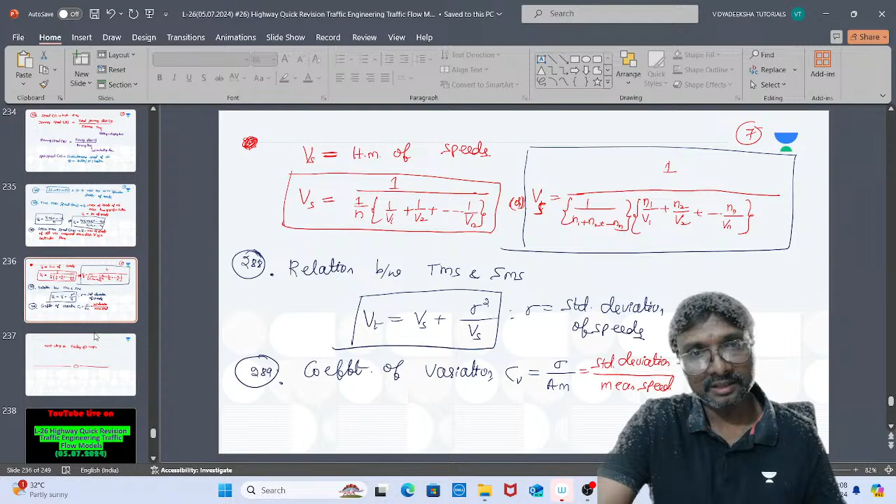Coefficient of variation, so 289 point gets over. Now we'll be going for the 290 point, and what is it? Traffic engineering, traffic fundamental models. Fundamental models are the fundamental flow models. We are going to discuss about them, 290 point onwards. So any doubts in yesterday's class? Up to yesterday's class, any doubts anywhere? So this is the highway engineering quick revision, this is your first slide.

I can call you Pavan. Okay, very good. Because generally whatever name I see there, with that name only I'm more comfortable calling. One sec, just a minute. I think here something is there. Sorry, in this video it will come, not in the display capture. Okay, one second. Is it okay now? In the background these are not visible now? Yeah, now my image will be clear. Okay, very good. You also attended? You did not comment anything?

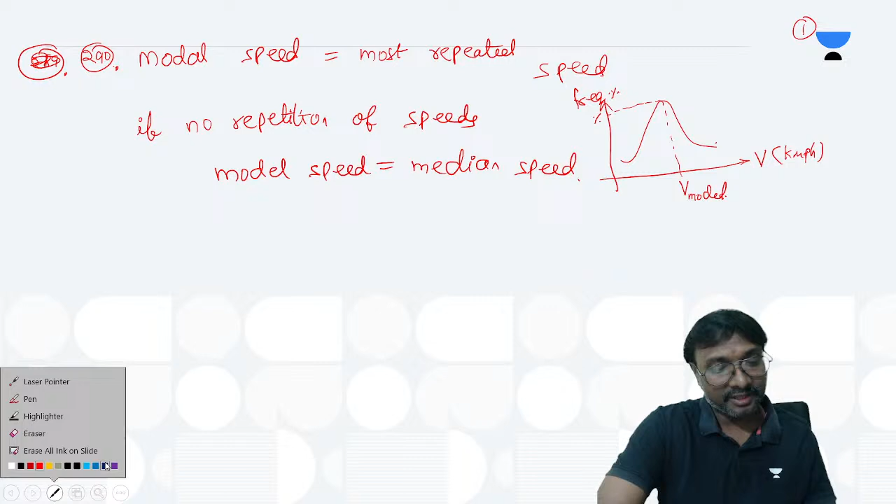Any idea? The modal speed will be taken equal to your median speed. So what is that median speed? Median speed is nothing but the central speed. It is not the average value, it is the central speed, right?

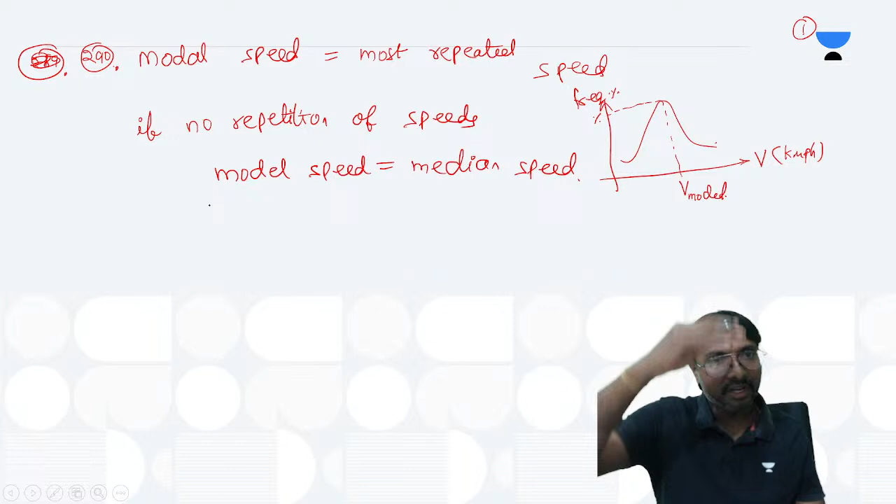Central speed means, suppose you have some 5 values, arrange all the values in ascending or descending order, and the middle value will represent the median speed. And if you have 2 values at the middle, you have to calculate the average of those 2 values. Got it? Now what is another one?

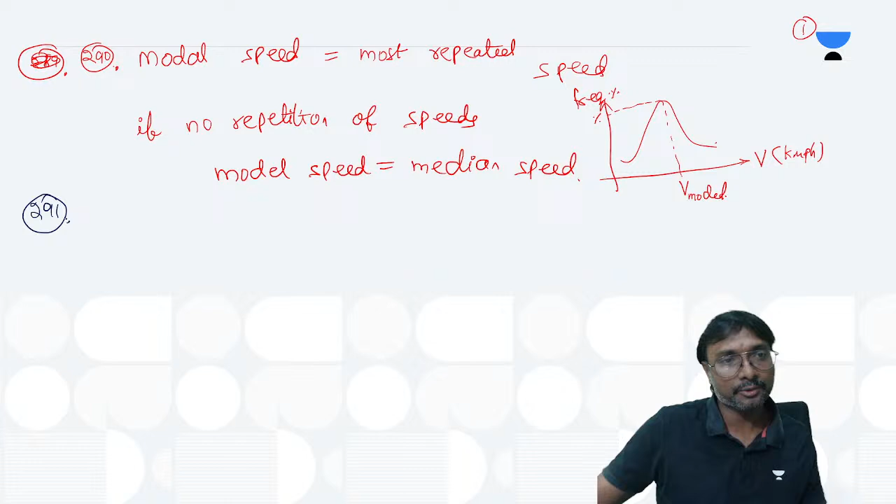So here, 98th percentile speed. What is the 98th percentile speed used for? This is the geometric design speed. It is useful for geometric design purposes.

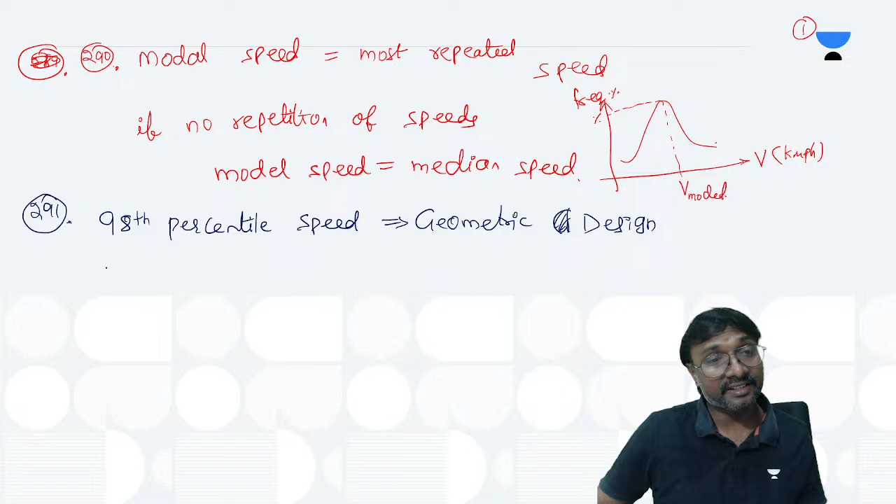Now whenever you are designing for this 98th percentile speed, can we keep the speed limit as the 98th percentile speed, or is it better to keep the speed limit lesser? If you are designing for 100, you keep the speed limit at 80, so that they will travel at 90 and will not cross 100.

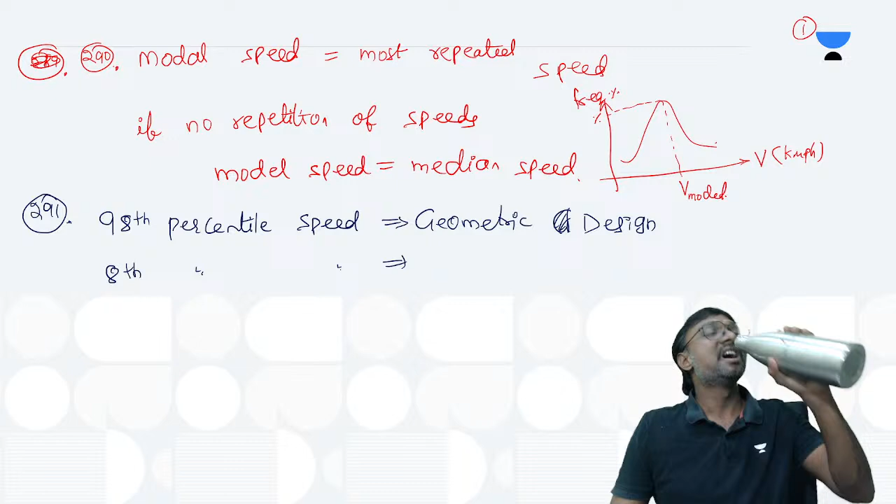Based on the psychological behavior of people, when you are designing for the 98th percentile speed, what do we need to do? You have to allow the safe speed, or maximum speed, lesser than that only, definitely. So it is your safe speed limit, or you can also call it the maximum speed limit

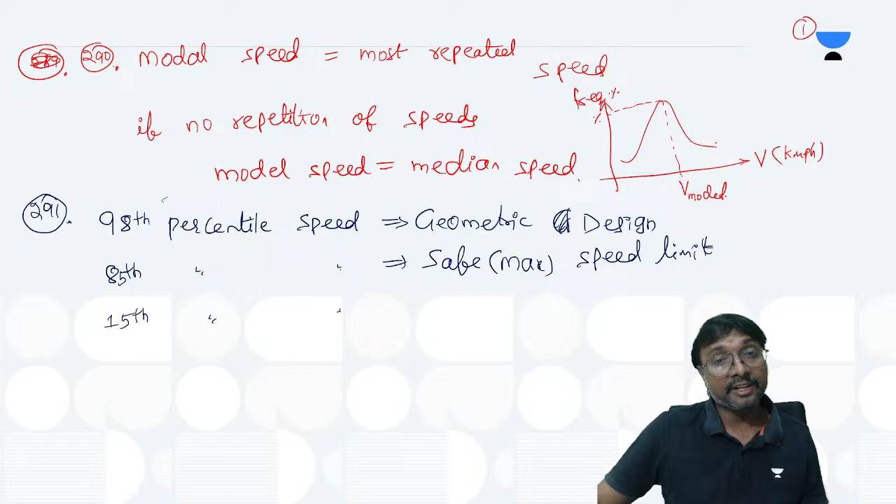on the road. The speed limit boards you find on the road are 85th percentile speeds. Not 8, 85th percentile speeds. Now what is the 15th percentile speed? It is taken as the minimum speed limit. This is the minimum speed limit we have to go for. Is that clear? That is regarding speed.

Now next one, traffic density or traffic concentration.

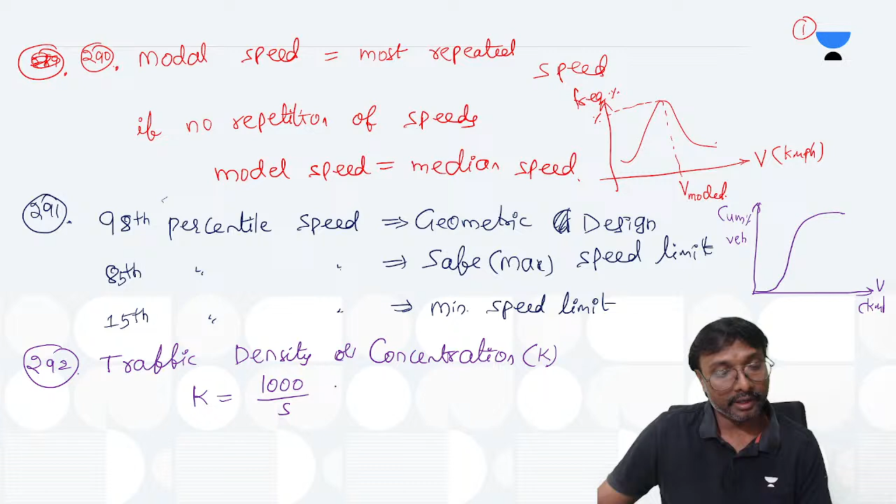So what is the symbol we are using for this traffic density or this concentration? K is the symbol we are using, right? So how can you get this K? That is 1000 divided by S, or you can also write it as 1 divided by S, right? 1000 by S or 1 by S.

First of all, what is that K value representing? Tell me. That K value is the number of vehicles present per unit length at a particular time of observation. What is that unit length we have to consider? 1 kilometer we have to take as a unit length. The number of vehicles per kilometer you have to consider, right?

If S is in kilometers, K is 1 by S. If you are substituting S in meters, it is 1000 by S. Why that 1000? Tell me. That 1000 is useful for conversion from meters to kilometers, right? That is how you can calculate it.

What is that S value here? That S value is the average center to center spacing between vehicles. Average center to center spacing between the vehicles, right? Or you can also get it as the average length occupied by the individual vehicles, right? Got it?

Now this one, tell me. Do this and tell me, then we'll move to the next part. Okay, done. That is your

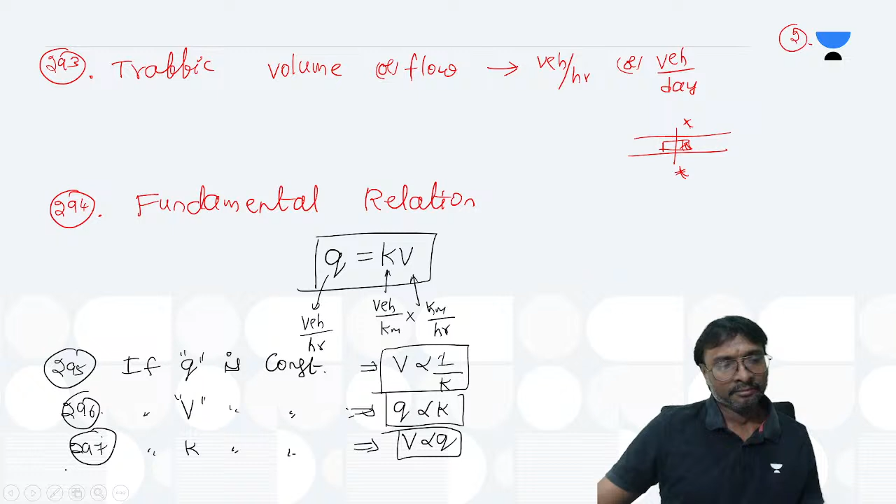Now if we just observe, which one is important for us? Tell me, the maximum flow is only important for us.

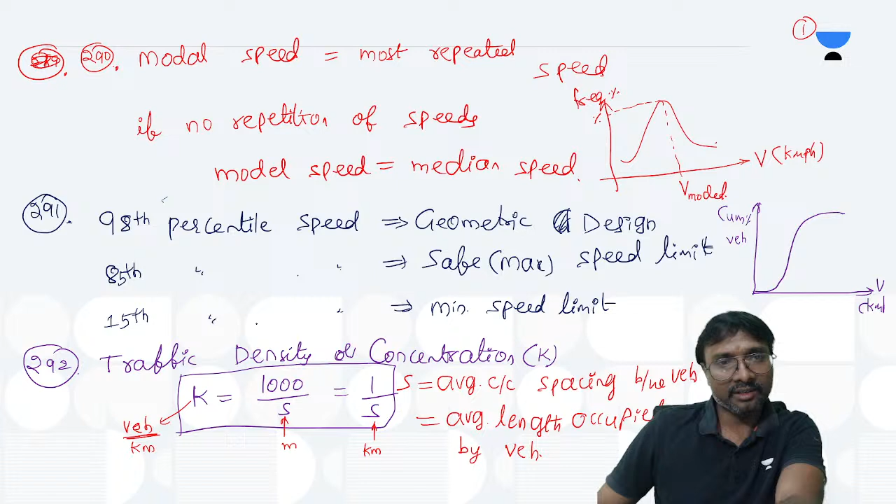Where has it gone? One sec. Whatever I have written, it has gone completely. Arre baba. Is it gone? One second. It is there. After this, nothing is there. One second. It was not there. It is erased.

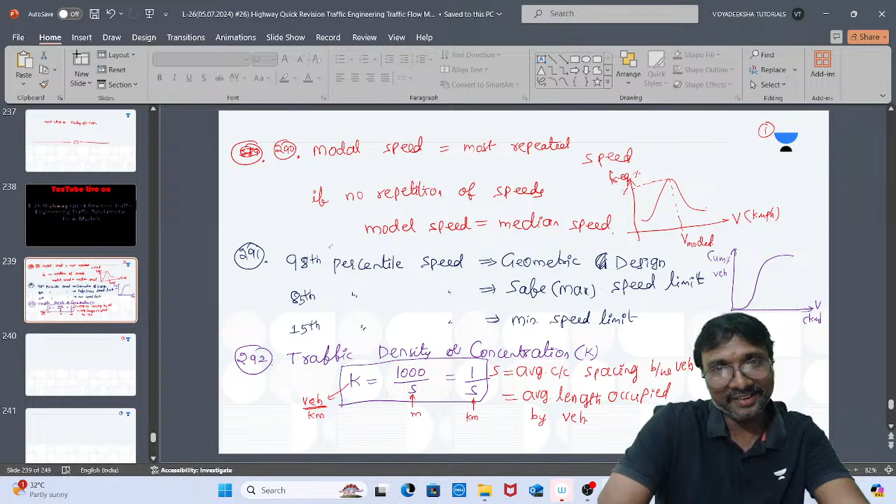Okay. Right. So K, you are having 292. So what is that? That is your traffic volume or traffic flow. We will be giving the symbol Q. That is your

Again this has started. I don't know why.

It is the number of vehicles per hour, or you can also say it as the number of vehicles per day. So this is the number of vehicles crossing a given section of highway. This is your section XS. How many vehicles are crossing in 1 day or in 1 hour, you can say.

Now, what is that fundamental relation, or these fundamental models? That fundamental relation, if you just observe, will be Q equal to K into V. Q equal to K into V. How do we know that? Q is in terms of vehicles per hour.

And what is that K? That is number of vehicles per kilometer. And what is V? That is your kilometers per hour. When you multiply these two, kilometer cancels, and vehicles per hour will be left on both sides, isn't it? Now 295, you just observe.

Suppose Q is a constant. When Q is a constant, what is the relation between these two? V is inversely proportional to K. That is the relation you are having. Similarly, suppose K is a constant, then you can say that V is directly proportional to Q.

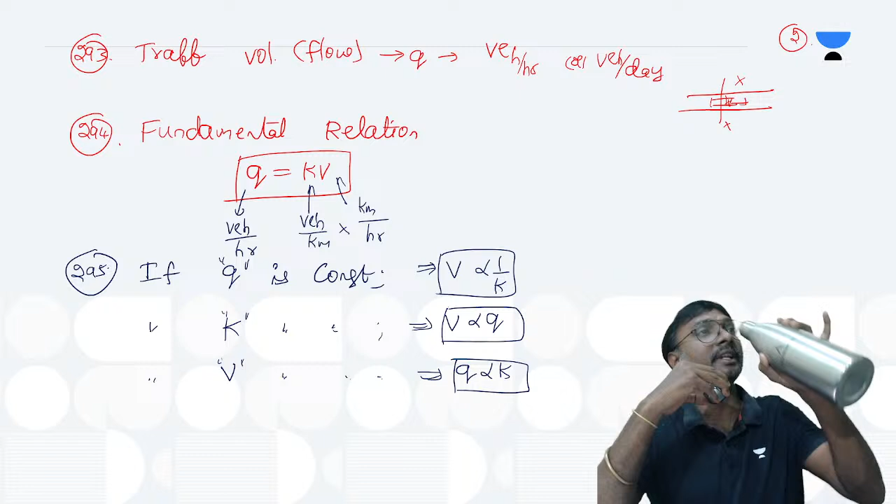Now, similarly, whenever V is a constant, what can you say? Q is directly proportional to K, right? Is it clear? So this is what we have seen. Note this and tell me, then we'll move to the next points in the next slide.

Done. This is your 295. Now 296. So here we wanted to get this maximum, yes or no? So practically, before we define any model, at k equal to 0, is there any vehicle present on the road? When no vehicle or a negligible number of vehicles are present, when you enter onto the road, what is the speed we can maintain?

We can travel with the maximum speed, isn't it? And Q equal to k into v is 0. V equal to V maximum, or the free flow speed. Vf is the free flow speed, V SF, the free flow space mean speed. By default, we have to consider the space mean speed only.

Similarly, at k equal to k maximum, that is your kj. What is k maximum or kj? Jam density. Density under jam conditions. V equal to 0. Under a fully traffic jam condition, no vehicle is moving, therefore q equal to 0.

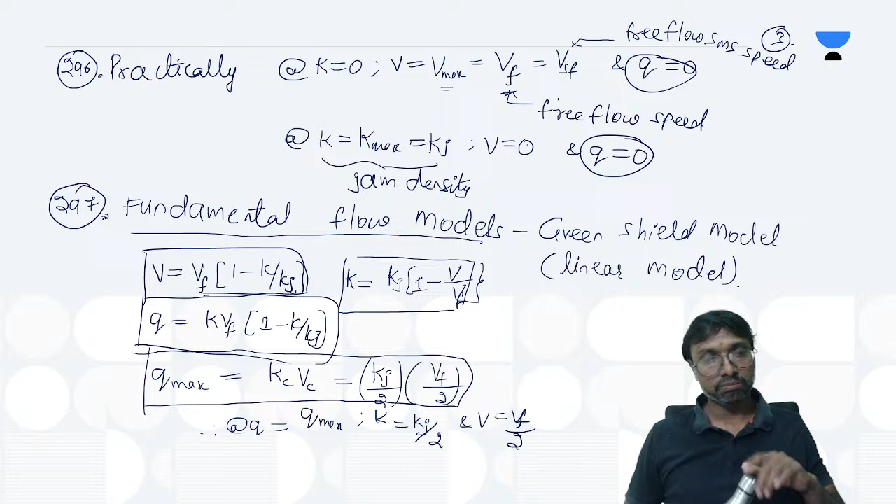So therefore q = q maximum. What is the k you are having? k = kj/2 and v = vf/2, right? Like that you are having. So this is the maximum flow and the corresponding density and speed. Okay, note this and tell me. Note and tell me.

Yes, at k = k maximum. What have we mentioned? k = k maximum means fully traffic jam condition. Under fully traffic jam condition, I am explaining that only. Under fully traffic jam condition, will any vehicle move forward or will no vehicle move forward? Tell me. No movement.

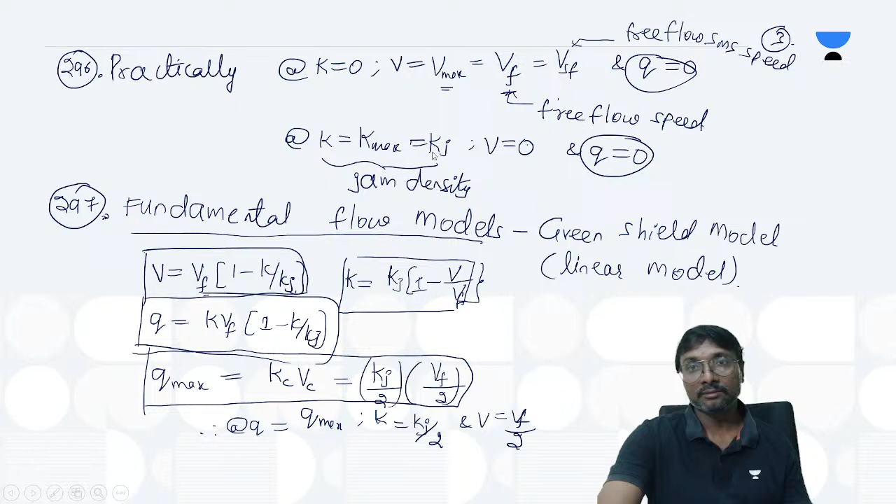What is the flow you can say? When it is full of vehicles, no vehicle is moving. No vehicle moving means no flow automatically. No flow means zero flow. Is that clear? That is this 297, 298, na? And when you are considering this 298, now if you just observe the relations.

Greenshield models, right? Fundamental diagrams. Between which parameters do we have to take these fundamental diagrams? That is V versus K. What is the diagram? Anyone having idea? Next, this is Q versus K. V versus K you can say, right?

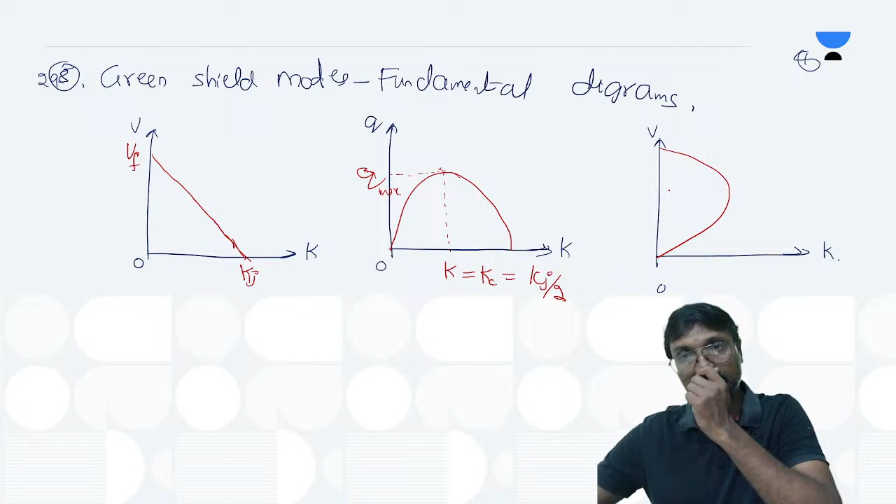That is your Q maximum. Corresponding to this Q maximum, what can you say? That is K = Kc = Kj/2, K corresponding to the capacity, right? Kc into Vc. So this is your V versus Q, na? V versus Q. Okay?

Got it? At V = Vf/2, Q = Q maximum. At K = Kc or Kj/2, what can you say? That is Q maximum, right? So here we'll be closing the session, with this the Greenshield model gets over, right?